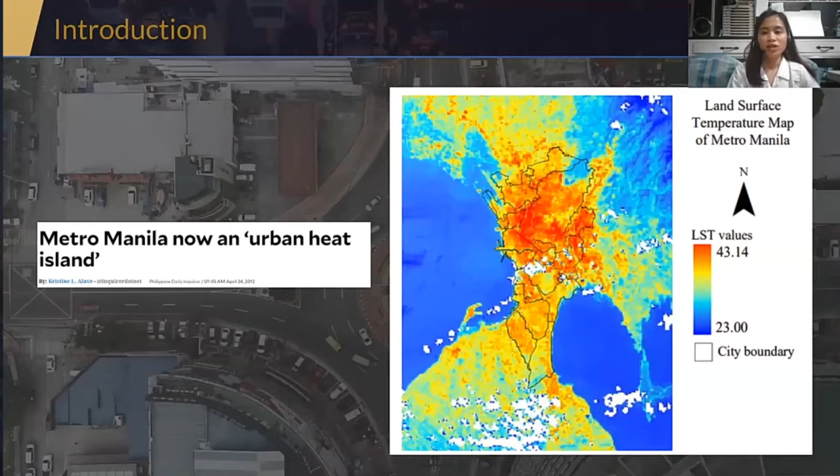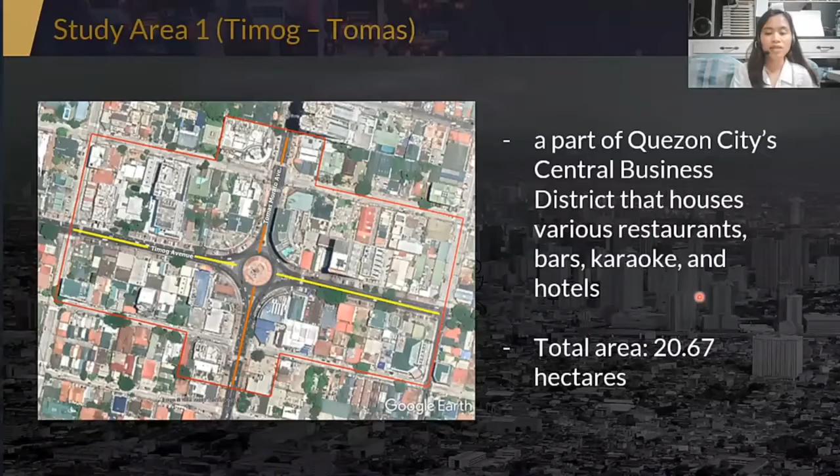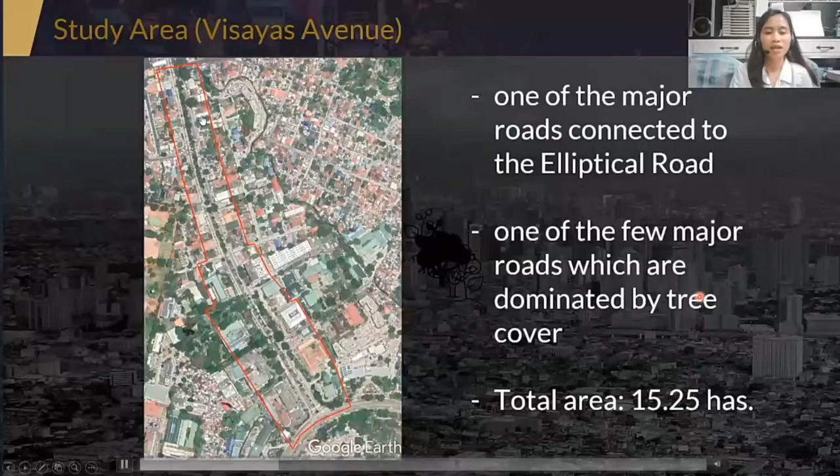and the total area is 20.67 hectares. So, ang second study site po natin is in Visayas Avenue, which is one of the major roads connected to the elliptical road. Also, isa po siya sa ilan lamang na major roads na dominated by tree cover. So, we have a representative of a commercial or urbanized district in Quezon City and an area which is tree dominated.

So, para po makapag-produce kami ng model in those sites, ay nagkaroon muna kami ng drone survey at annotation fieldwork, wherein nililist down namin through a mobile app yung mga materials and measurements na nakikita namin on the ground. Also, ang mga kailangan nating layers para makapag-produce ng output ay buildings, trees, and vegetation surfaces. And it includes the materials and measurements of the buildings and the trees, including the height, the crown diameter, etc.

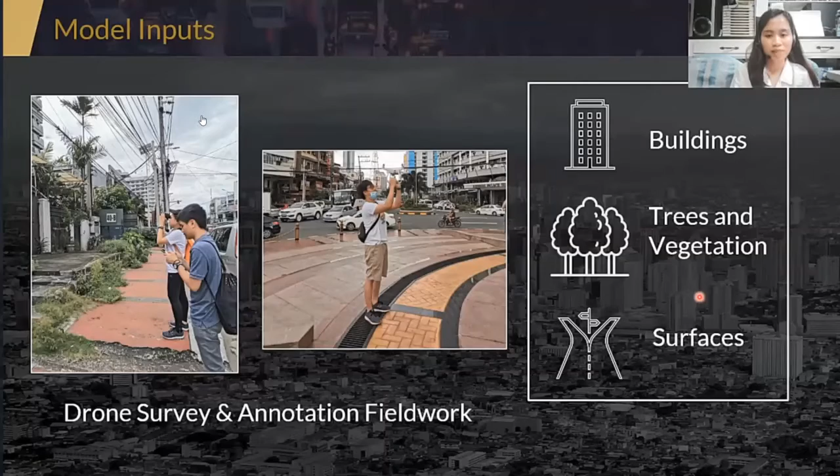These are the layers from the drone survey. We have the orthophoto na ginamit po natin sa pag-digitize ng mga buildings, sa pag-validate ng results ng annotation fieldwork. We also derive the surface height para malaman yung heights of the buildings and other features on the ground.

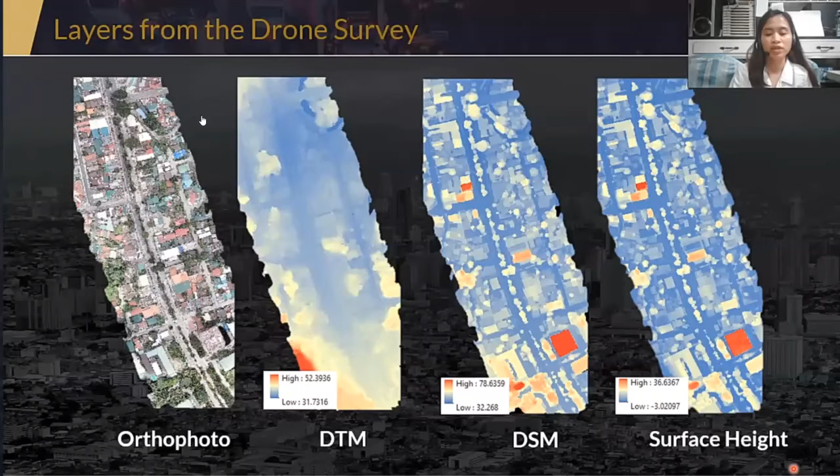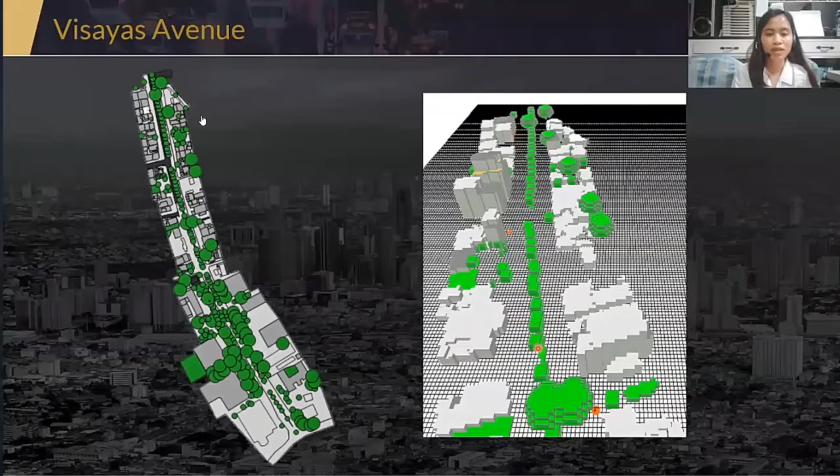So, for scenario 1, sa model, i-simulate po natin yung current scenario of both sites. So first, dito muna po tayo sa Visayas Avenue. So these are the layers from the fieldwork. And ito po yung ortho or the drone photo. And makita po natin yung mga materials na present in the area. In roads, we have asphalt and concrete. For the buildings, for the roof and wall materials, we have concrete, bricks, tiles, iron, and steel.

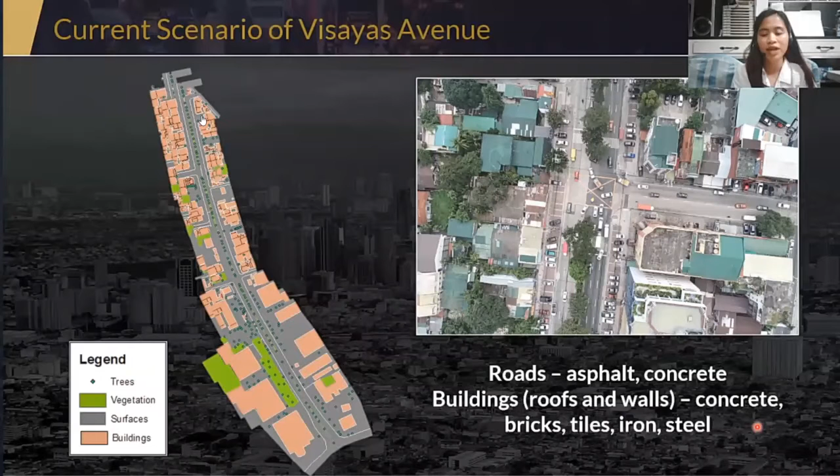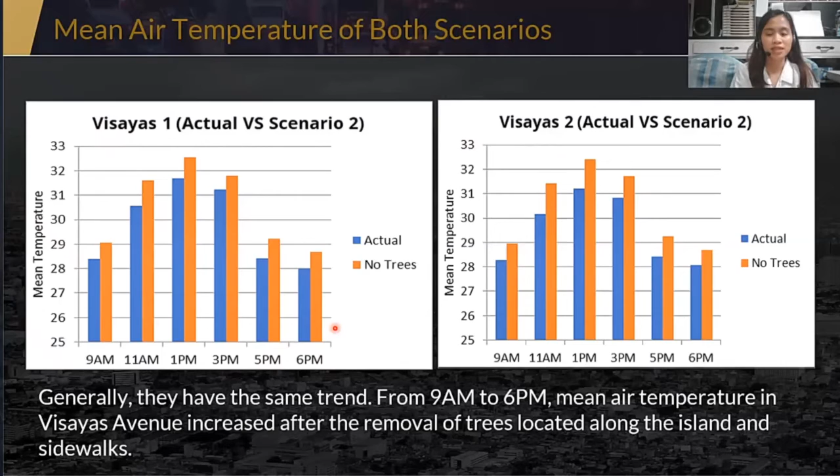Visayas 1 ay yung upper region, and Visayas 2 yun po yung lower portion of Visayas Avenue. They have the highest temperatures both at 1 p.m. and sa bawat oras po ng simulation ay nag-increase nung inalisan natin ng trees. So, para po makita natin yung difference between the two scenarios.

In the upper portion, dito po at 9 a.m., around 0.7 degrees Celsius yung tinaas ng temperature, and at 11 a.m., it was as high as 1.06 degrees Celsius. And dito po sa Visayas 2, which is in the lower portion, the highest change in mean air temperature was also at 11 a.m., which is 1.26 degrees Celsius. Mas malaki po yung effect dito sa lower portion by only 0.1 degrees Celsius.

So, it is to quantify the change in the mean temperature. So, the removal of trees in Visayas Avenue had an effect of 0.58 to 1.06 degrees Celsius in the upper portion and 0.64 degrees Celsius to 1.26 degrees Celsius in the southern portion.

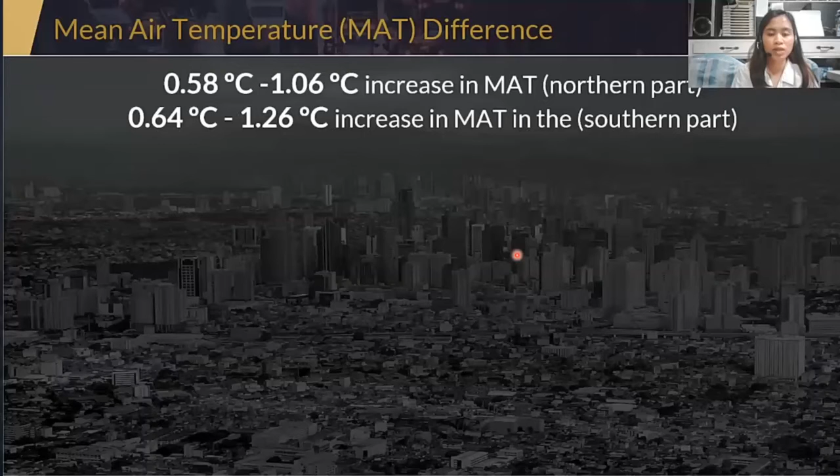So, tingnan po natin closely yung isang portion ng Visayas Avenue. So, ito po yung center island, and ito yung differential map of Visayas Avenue at 1 p.m. Meaning, pinag-subtract po natin yung map from the second scenario at actual scenario. At makikita natin yung difference in the center island, which is around 1 degree Celsius in this particular region. But the increase in temperature is also evident in the nearby concrete open spaces, which is as high as 1.7 degrees Celsius only in this portion.

But in some areas, may nag-increase in temperature of around 2.33 degrees Celsius. So, yung effect ng pagtanggal ng trees po natin ay hindi lang evident yung effect sa center island, but also sa surrounding spaces.

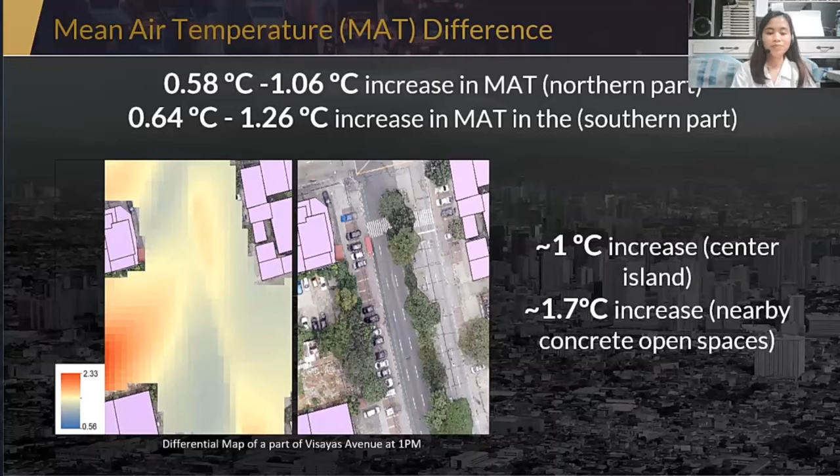Next, we move to the second study area, which is in Timog, Tomas. So, we also model the current setup or the actual setting of Timog, Tomas. This shows the surface cover of Timog, Tomas, na yung roads po natin ay covered with asphalt and concrete, and same as Visayas Avenue, the building materials including the roofs and walls are concrete, bricks, tiles, steel, and iron.

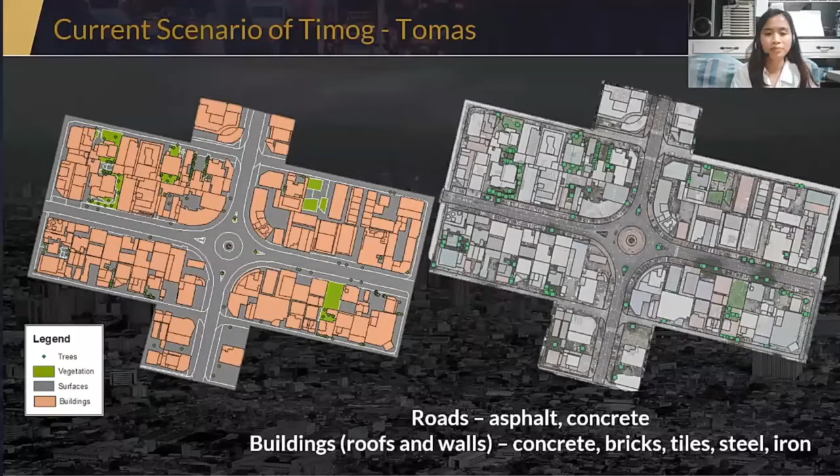So sa scenario 2, nagpasok tayo ng isa pang UHI mitigating measure, which is green walls and green roofs, meaning vegetation on the wall and vegetation sa roofing. So, urban vegetation is considered as one of the most effective measures to mitigate UHI effect. Yung pag-integrate ng green surfaces in the urban environment.

Also, these are just some of the benefits of the vertical greening systems in an urban setting. One, it is to address the problem in limited space for horizontal urban greenery. Since sa urban setting ay kukonti na yung space para makapagtayo ng green parks or green spaces or makapagplant ng trees, these vertical greening systems address the problem of the limitation of space. Also, reduce energy performance of the cooling systems. Next is to reduce stormwater runoff. And lastly, to mitigate UHI.

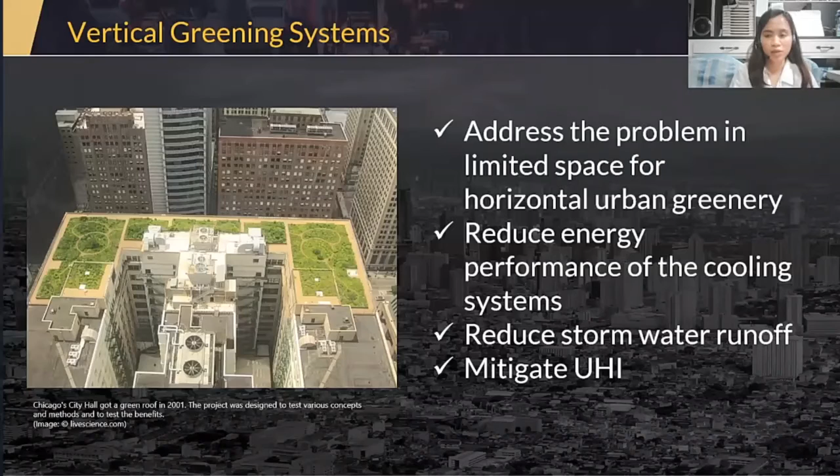So, this is the second scenario of Timog Tomas. We can call it the green building scenario, but only 85 out of 328 features ang nakapag-incorporate ng green walls at green roofs sa Timog Tomas. This is because we consider the existing building structure na kaya i-support yung green walls and green roofs. We choose the buildings that have solid walls and frail roofs.

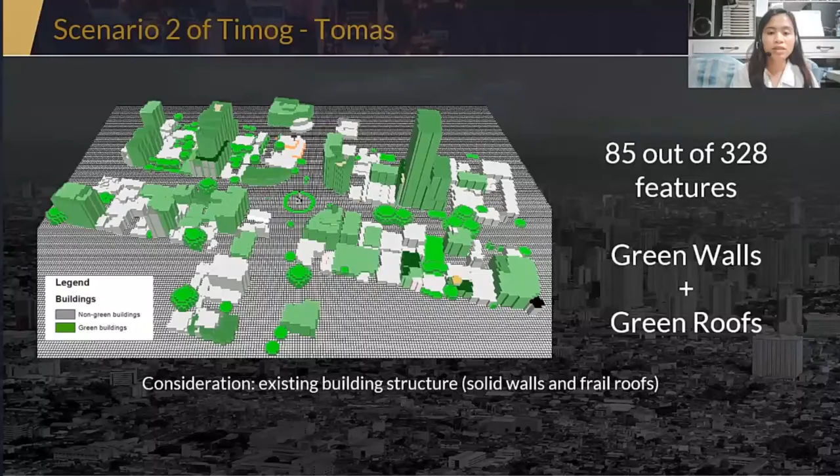So, here are the results of the simulation, and these are the differential maps of Timog Tomas wherein sinubtract natin yung green building scenario at current scenario. So, green regions up to blue regions ay yung mga areas na nag-cool down. And we found out that in Timog Tomas, at 2 p.m. to 5 p.m., naging evident yung cooling effect ng green buildings, which is the green walls and green roofs. Dito lang natin sa mga oras na to na-observe yung cooling effect nung pag-install ng mga vegetated walls and roofs.

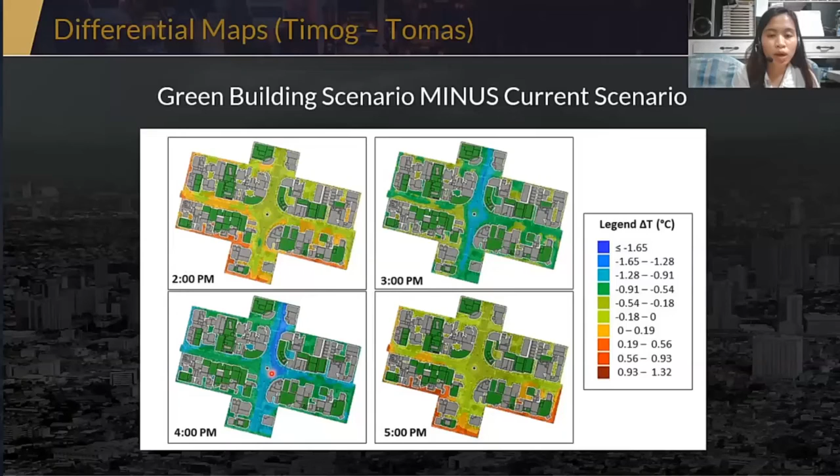But we can also see that the entire site cooled down at 3 p.m. here and 4 p.m. So, we can also say that the cooling effect was strongest in this area, here and here, dahil siya po yung may pinakamalaking temperature change sa lahat ng oras. It is along Tomas Morato Avenue. Also at 4 p.m., nandito po yung strongest effect, which is around 1.65 degrees Celsius.